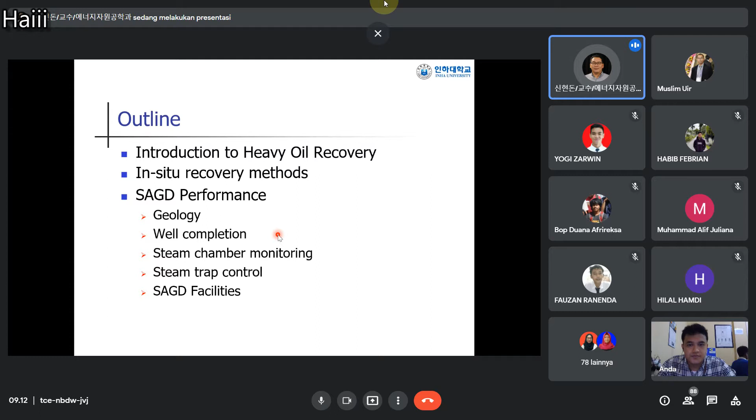So as I mentioned, some heavy oil and in-situ recovery methods depend on viscosity, in centipoise. But if the viscosity is high, the primary recovery factor is very low, and we need to do something to reduce the viscosity. That's why you use thermal methods, meaning you inject heat. One popular method is steam, a thermal process, a steam injection process.

We're not talking about oil shale here, because oil shale is an oily shale that exists as kerogen, so this is not oil yet. That means you have to cook it, heating above 340 degrees C to convert the kerogen to oil. The United States has a whole bunch of oil shale, but I think they don't have much chance to develop it because they have shale oil, and with the energy transition, the demand for oil and gas may decline or stay constant. So the situation has changed.

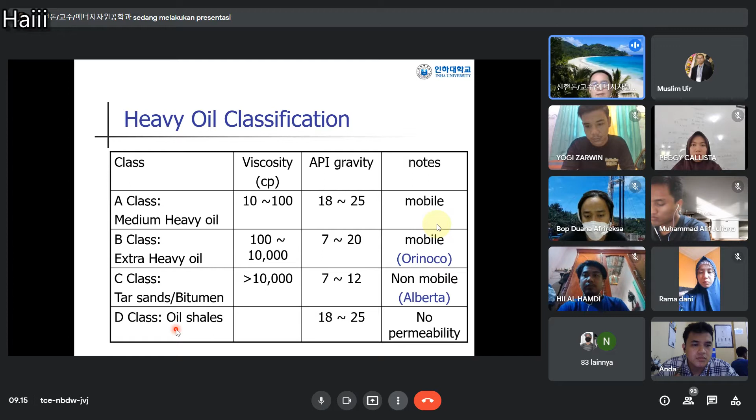Heavy oil and oil sand exist mainly in two countries: Venezuela's heavy oil is about 2 trillion barrels, and Canadian oil sand is also very close to 2 trillion. So the total world reserves at this time, probably by the end of last year, are close to 1.7 trillion barrels of total world reserves. But these numbers are actually resources—only 10 or 20% of the resources in these two countries have already been converted to reserves.

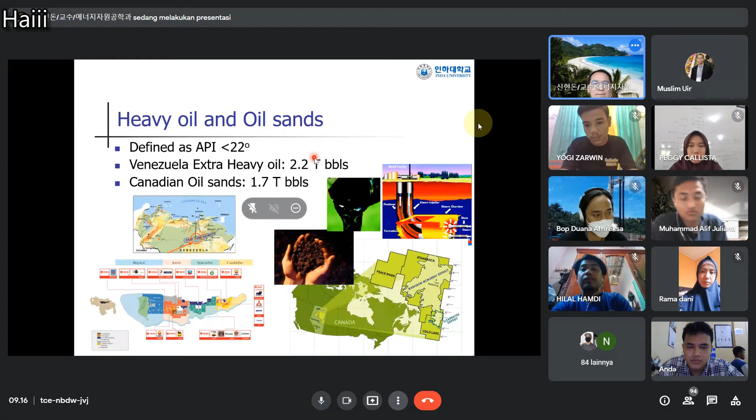We are talking about unconventional resources, which means they are difficult to produce. Why is it difficult? We have two issues. You already know from the Darcy equation that flow rate is a function of permeability and viscosity, and delta P between reservoir pressure and wellhead pressure.

We're talking about these two issues: permeability, how easily your rocks allow fluid to move from one place to another. For shale gas and tight gas cases, you already know gas doesn't have issues in viscosity. But why is it difficult to produce? Because shale and tight sandstone have very low permeability.

So if you want to increase production of oil, you have to reduce viscosity and increase permeability. If your reservoir has low permeability or high viscosity, you have problems with production, meaning low recovery. Shale gas and tight gas have problems in permeability, so how can you increase production by increasing permeability?

Hydrofracturing: you inject high pressure water and create fractures, breaking your rocks, then produce through the fractured areas. Now for oil sand cases, we have problems in viscosity.

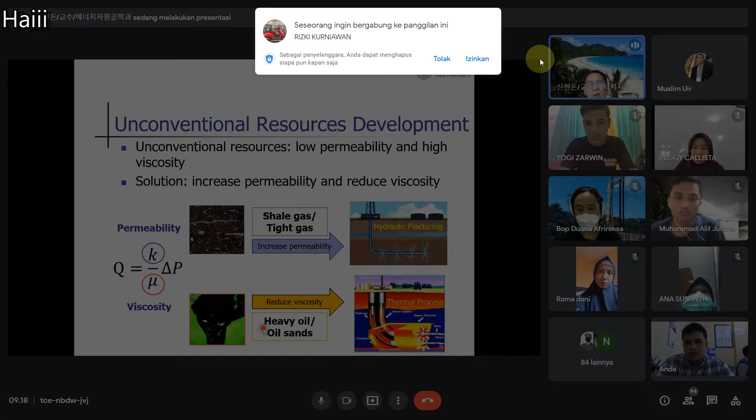In heavy oil and oil sand, how can you increase production? Maybe you have to reduce viscosity before main production. That's why thermal processes are applied to reduce the viscosity.

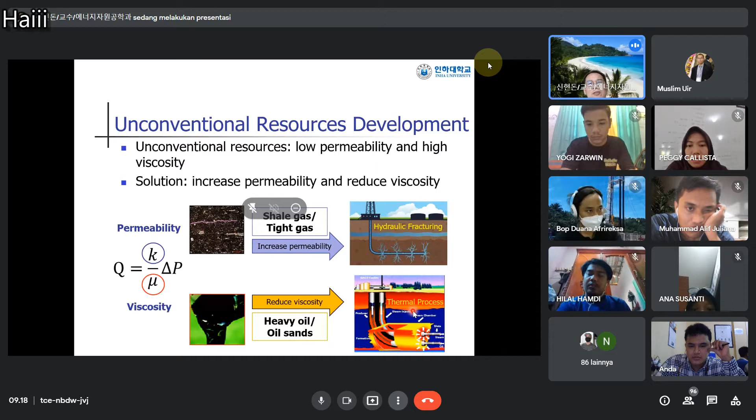These are the two issues. That's why unconventional resources all the time have one or two of these issues, either lower permeability or high viscosity, and you have to solve these issues to produce. Even for the same oil, sometimes they have different recovery processes.

Viscosity changes by log scale, and the x-axis is temperature. That means as oil heats up, your reservoir temperature increases by depth. So at a shallow reservoir, even at 10 degrees C, the viscosity of the oil can be 1 million centipoise, which is a huge number. Heating the reservoir up to around 55 degrees C...

...the viscosity of the oil reduces maybe to 1,000 or 2,000, which is enough for it to be mobile. That's why in Canadian Athabasca oil sand areas, the temperature is very low because it's shallow and Canada is very cold. The average reservoir temperature is close to 10 degrees C.

The Orinoco Belt in Venezuela has probably 500 to 800 meters depth. They have high geothermal gradient, so the reservoir temperature in Orinoco Belt is close to 50 to 60 degrees C. With the same oil, they probably reduce the viscosity down to 1,000 centipoise.

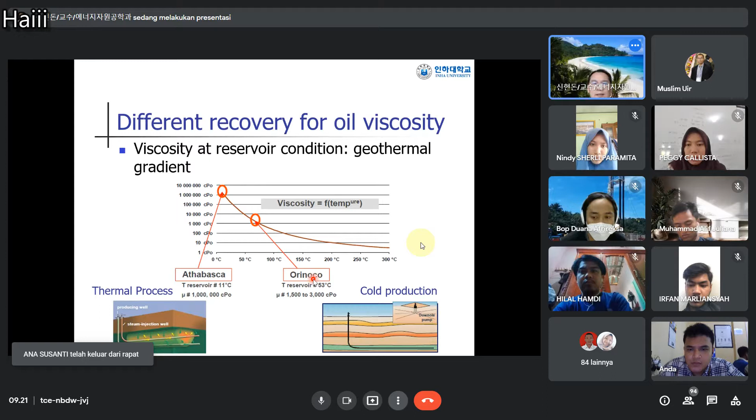Maybe maximum 15% depending on viscosity, even when viscosity differs within the same reservoir. But if you want higher recovery factors in Orinoco Belt, you have to apply a thermal process, and then recovery factor can go from 10 to 50%. In Athabasca, for the SAGD process, recovery factor is up to 50 to 60%.

That's why it's very important for the steam process to understand what kind of effect it has on viscosity. On the right hand side you have the viscosity graph we already saw: low temperature means high viscosity. AB, CL, and PR are different locations in the Canada oil sand basin.

AB is Athabasca oil sand, CL is Cold Lake, and PR is Peace River — short naming of regions. Athabasca has the highest viscosity, more than a million centipoise.

The lowest is the Cold Lake area, at 30,000 centipoise. It's a big change there. But once you inject steam and heat it up, this converts to around 10 centipoise range.

But be careful with steam. You make steam at room temperature or atmospheric pressure, which is standard condition. You heat up to 100 degrees C to make steam.

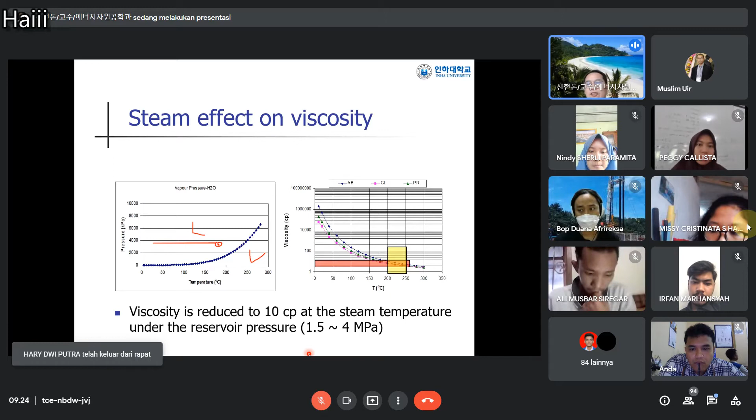Oil sand is sand plus bitumen, so it's unconsolidated - not consolidated rock. That's why it's mixed with bitumen with high viscosity. So two important things about bitumen: heavy and high viscous. That means the oil quality is not good, so it's cheap compared to conventional oil. Why does oil price change? Which is the expensive oil, which is the cheap oil? Because you use most of the oil to distillate into gasoline components. Heavy oil has more asphaltenes instead of light alkanes, or light condensate compositions like naphtha. So fewer light components - that's why it's cheap.

Why were they viscous or heavy from the beginning? No - when hydrocarbons generate underground, they were light oil. But I mentioned the deposition of oil sand and heavy oil is shallow. How did they move? They form in source rock, in organic-rich shale formations, generating lots of hydrocarbons. Hydrocarbon is lighter than water, and they move from deep locations to shallow locations by buoyancy. That's why they move up until they meet some trap structures. During that migration, the hydrocarbon experiences biodegradation - the grade actually gets worse, degraded by bacteria. The biological activities help degrade them, so we call it a biodegradation process.

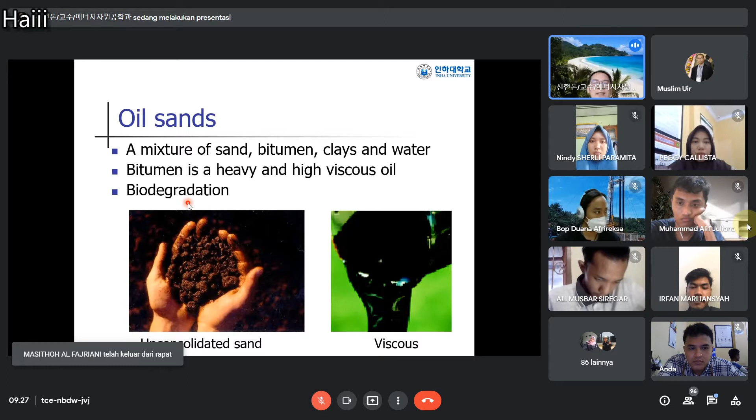Where do the bacteria stay? They live in the water formation. So the light oil moves to shallower places, and during migration it contacts the water formation. Then the light components from the light oil disappear, and the remaining oil gets heavier and more viscous. That's why they make tar sand and extra heavy oil in shallow locations.

Oil sand is good in the sense that it's easy to extract using hot water, because it's water wet. Water wet is a very important concept in petroleum engineering - it means your sand grain is covered by water, so the oil is between the pore space, and that means you can easily extract it from the sand grain. The same oil sand in the United States, in Utah, is oil wet - meaning the oil is sticky around the surface of the sand grain, so recovery is more difficult. That's why Canadian oil sand is easy to extract using water, especially hot water, in a mining process.

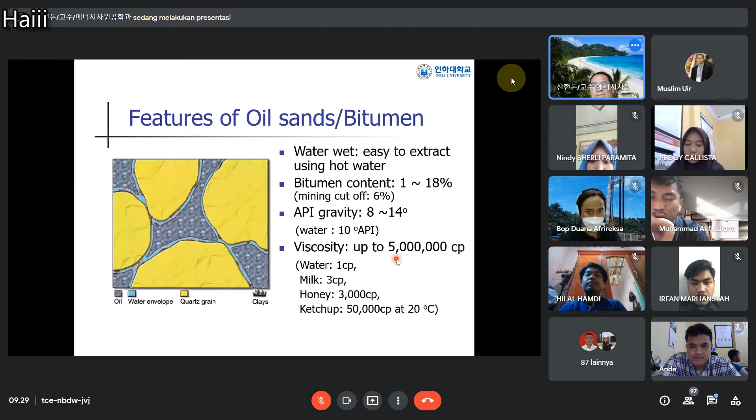API is sometimes less than 10 and viscosity is high. For example, honey has a viscosity close to 3,000 centipoise - you can imagine how viscous bitumen is. Sometimes it's 5 million centipoise, which is essentially solid with no mobility. That's why if you want to really produce oil sand, you have to reduce the viscosity - that's why you need to inject steam.

In Canada, these are the regions: the first province is British Columbia, and the second is Alberta. More than 70% of Canadian oil is located in Alberta province, bounded by the Rocky Mountains. There are two big cities - one is Calgary, where most oil company head offices are located, and the capital city is Edmonton. The University of Alberta is located in Edmonton, and the University of Calgary is located in Calgary.

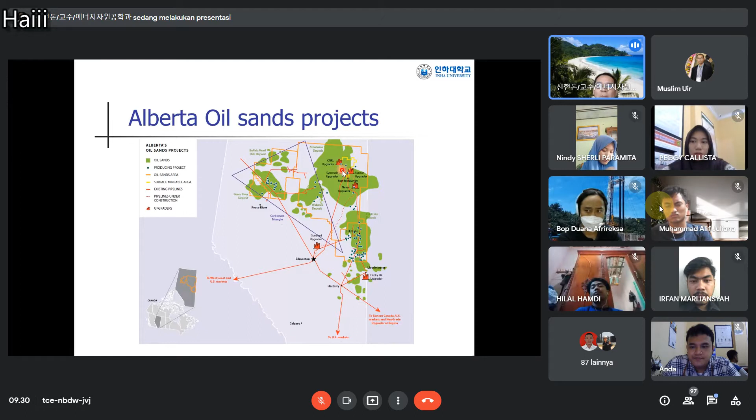Oil sand, how you can produce oil sand, there are two things. Mining process, because it's shallow at the surface mining, they do separation with big vessels, and they make bitumen. And then bitumen is a low quality hydrocarbon.

Hydrocarbon is composed of hydrogen and carbon. So these days hydrogen is very popular, right? You can separate it from the hydrocarbon. That's why these days 95% of hydrogen production comes from fossil fuels, because of hydrocarbon compositions, they separate. They add steam, because steam has H2O, which also has hydrogen, so they separate it from that.

So they upgrade it, meaning they make light oil, convert it to light oil, and make synthetic crude oil, we call it SCO, synthetic crude oil. And then they send it to the refinery.

The other method for oil sand production is SAGD, with steam injection, because there is no open pit - that's why we call it in situ.

In situ recovery, you inject steam, produce and separate, and then make bitumen. Usually you send this to upgrading, but upgrading facilities are usually integrated for mining. Why? Because the SAGD process for each project has a standard production rate close to 30,000 barrels, but upgrading facilities are more than 150,000 barrels. It's huge - that's why they can run 24 hours and feed these upgrading facilities around the plant at the mining site.

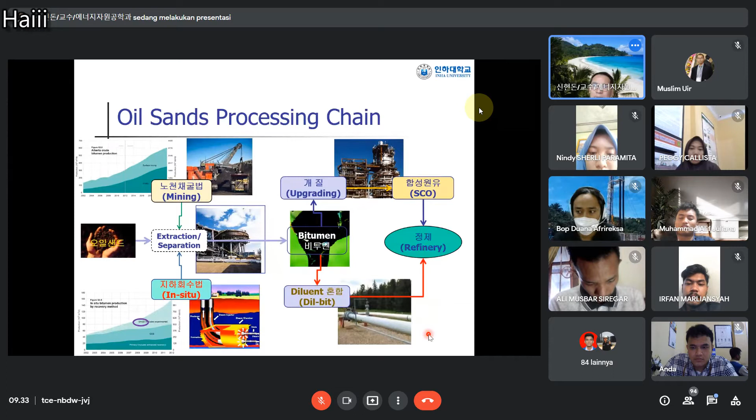Quick review for mining: they use shovels that are 100-ton size, and trucks that are 400 tons. So you load 4 shovels into this truck, and they generate 200 barrels.

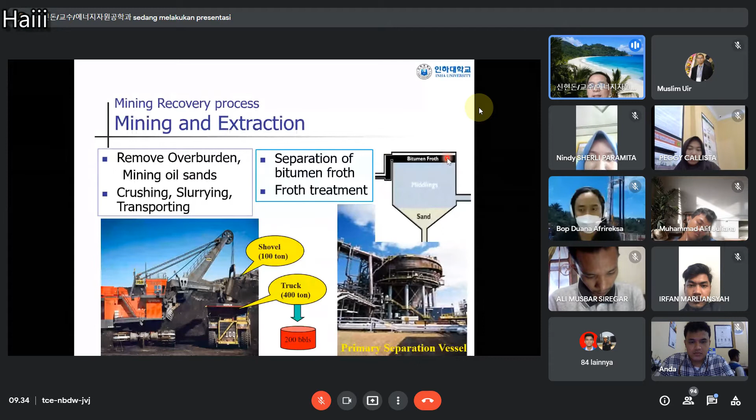They send this to big separation vessels with hot water, maybe 60 to 70 degrees C. They put in oil sand and stir it in centrifuges, and the heavy sand particles drop while the light bitumen floats via flotation. They remove this and send it to upgrading facilities.

Bitumen has a very reduced amount of hydrogen, meaning it's a heavier part of the hydrocarbon. Light oil has more hydrogen component compared to heavier oil, and heavy oil has more concentration of carbon because carbon is heavier than hydrogen.

So in upgrading facilities, how do you change the quality from bitumen to light oil? There are two methods: one is to remove or reduce the number of carbons, which gives you a relatively high concentration of hydrogen - that means light oil. That's how you remove the carbon - with coking.

The coking process produces carbon, and hydrogen addition means you use high temperature to crack the hydrocarbon bonds and add hydrogen to make light oil. The coking process is an old process - you inject 100 barrels of bitumen, and you only get 85 barrels because 15% converts to coke, which you remove.

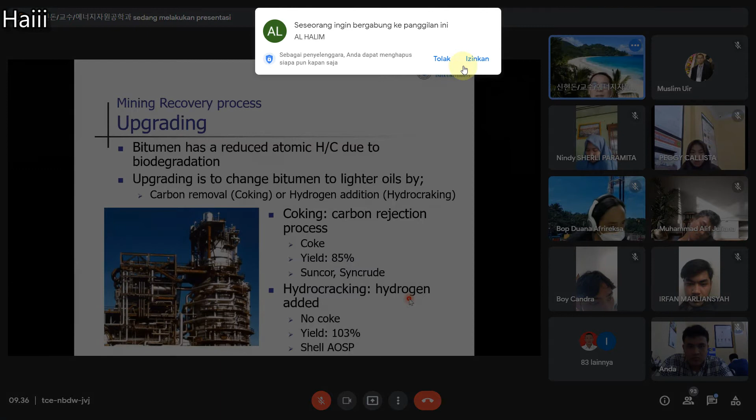Hydrocracking is a new technology compared to the coking process. The good thing is there's no coking, no headache, right? But they add hydrogen - 100 barrels of bitumen goes into the facility, and you can produce 103 barrels because you add hydrogen to make light oil. So that is the upgrading facility.

These days for hydrogen society, even if they don't use this for gasoline anymore in the future, maybe by 2050 or 2060, you can convert this to hydrogen production facilities through coking, or add more processes to generate more hydrogen.

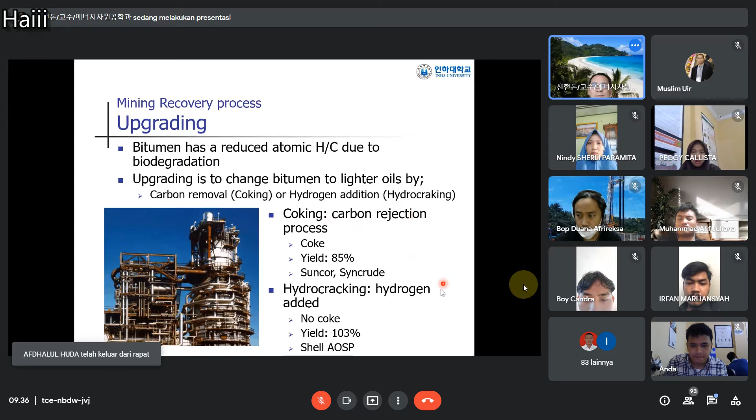One key parameter to evaluate the efficiency of the steam process is the steam oil ratio, SOR. This number should be low because the definition is: for 1 barrel of oil produced, how many barrels of steam do you have to inject. If the number is low, it means you have a better process requiring less steam, and less steam required means you don't need as much energy to boil the steam.

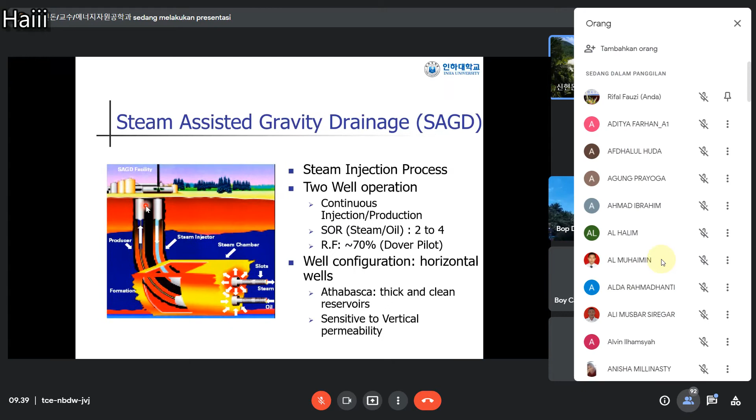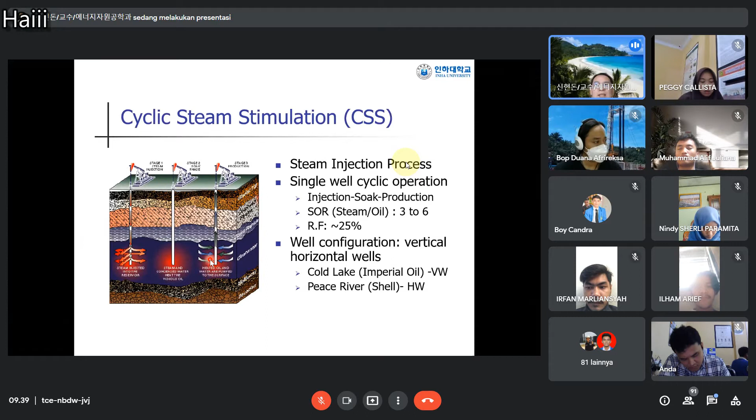These are two parallel wells drilled, and the upper well only injects steam. The steam rises and condenses to liquid, reducing viscous oil down to the production well. So this is the injection well and this one is the production well. The distance between them is 5 meters apart. These are actually a continuous process, because the previous one, CSS, is a cycle: inject, soak, produce. So the timing is different, right? Here it's continuous injection and continuous production.

So this one actually achieved up to 70% final recovery factor in a pilot project. And the steam oil ratio, less than CSS, is 2 to 4.

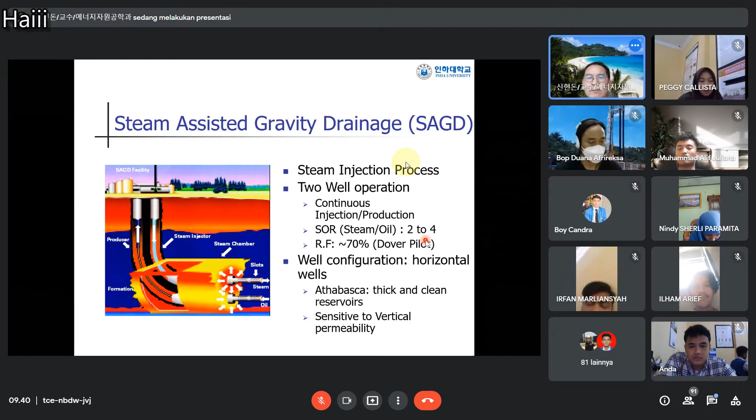So less than 4 means we can make money from this project. And for the steam process, lots of people criticize why you use steam, because you're using water and burning natural gas in the boiler. So people think about how we can reduce viscosity except by heat. They say, from the dilbit you may already know, right, you mix with light oil and you can reduce viscosity. So they apply this technology and inject solvent into the reservoir with SAGD-type, same horizontal wells, but instead of injecting steam, they inject solvent. But this process is actually very slow because it's diffusion at the molecular level, leading to low production.

So probably less than... just probably 5 cubic meters, meaning around 30 barrels per day from the pilot. So they did this pilot project, but they only had a chance to reduce viscosity at the interface. The problem is how you can expand or quickly replace the interface volume. That is very difficult, and also you cannot control it. And injected solvent actually goes somewhere near the reservoir, but we don't know exactly where it goes. So we call this solvent loss, the loss of solvent into the reservoir meaning no return to the surface of more than 50 or 60%. That's why they lose.

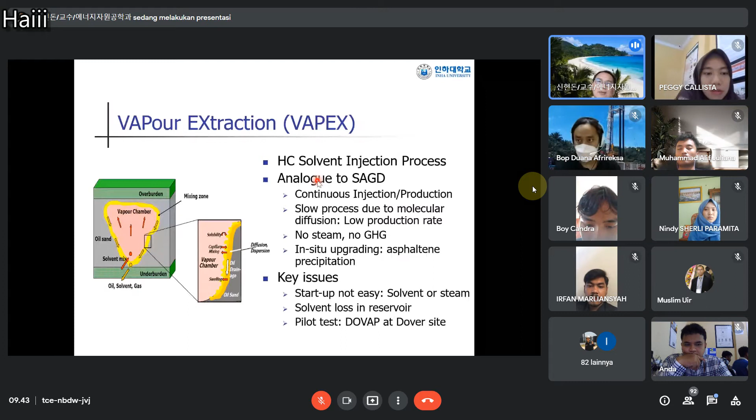Now people think, how about we mix the two? So hybrid steam and solvent co-injection. You get the synergy: some heating for viscosity reduction, and the solvent for dilution also reduces viscosity. They can keep oil production at a higher level, and at the same time lower the steam oil ratio. So it's a hybrid between these two.

But sometimes new people say instead of just using solvent for dilution, the solvent heating up can cause a phase change. So phase change means the vapor condenses to liquid and releases energy. But the energy absorbed during the heating is different for individual materials.

Maybe after class you can look at what is the latent heat. Latent heat of vaporization, look at the latent heat of water. Water is probably more than 2000 kilojoules of energy per 1 kilogram, but for solvent maybe only 300 or 400. So that means the solvent doesn't have much energy needed to vaporize. But why do we use water? Because you have to carry the energy from the surface downward. That's why the same volume of material carries more energy from surface to downhole. That's why it's very popular to use the steam process.

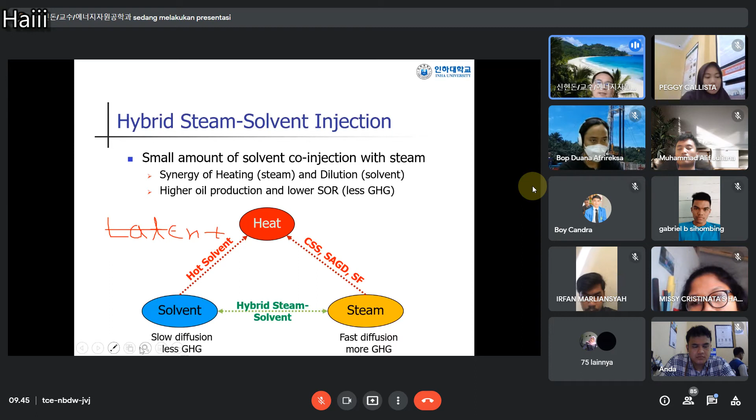Water compared to solvent has maybe 8 times higher latent heat. Alcohol in beer has around 800 kilojoules latent heat level, but that's still only 1/3 of water's. That's why water is easily accessible and has high latent heat. That's why when phase change happens, it can carry lots of energy to other places. In Korea in the cold winter, they circulate heating water, and hot water circulating releases energy to your room. It's the same thing.

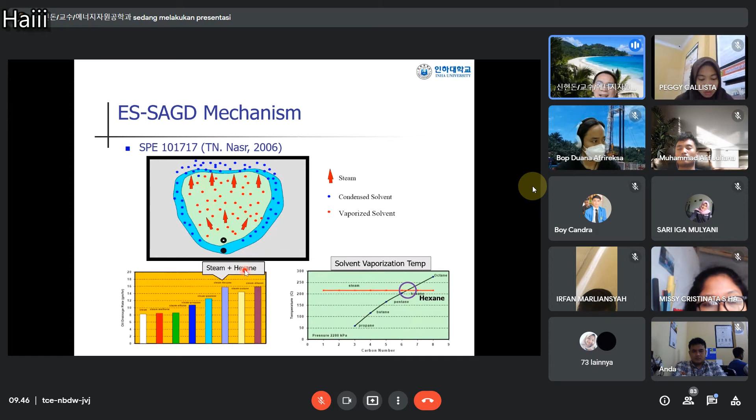One of the typical things is ES-SAGD, expanding solvent SAGD process. They co-inject steam and solvent, but different types of solvent give different recoveries. They found the maximum case is hexane. Why hexane co-injection with steam? It brings more production. Steam at this pressure, 212 degrees C, has the phase change happen, and hexane is very close to steam/water in converting phase at this temperature. So you have to select a solvent with very similar vapor pressure and temperature to main steam process. That's why steam with hexane gives the best performance - heavier one is better.

So I've finished the heavy oil introduction part, now moving to SAGD. As mentioned, we have 2 horizontal wells drilled, and steam rises up. At the interface with the cold reservoir, it condenses, and the condensate is heavier, so it flows down by gravity to your production wells, allowing continuous production.

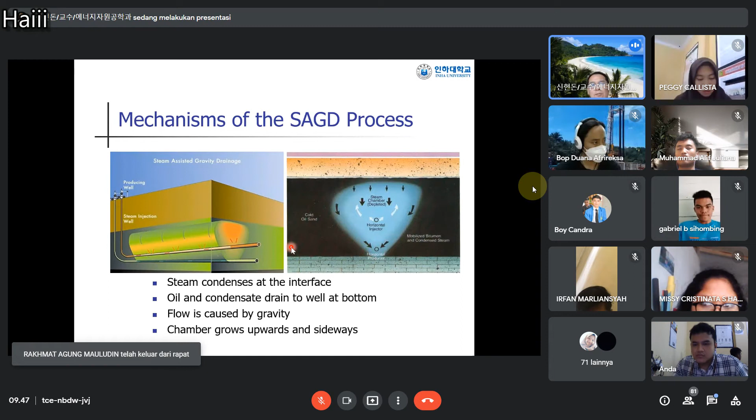From the beginning, you have rising and then expanding. Preheating means there are 2 wells 5 meters apart with no communication, no flow. That's why you have to heat up this area to create mobility first by circulating steam in these 2 wells. Later, you inject lots of steam but get no production, so you have to shut down.

That process we call wind down. Wind down means you maintain reservoir pressure by non-condensable gas injection. Non-condensable gas injection uses typical non-condensable gases like nitrogen and methane. Methane gas you can just compress - you cannot make it liquid. You'd have to cool it below minus 162 degrees C to make liquid, not ice. So non-condensable gas behavior doesn't depend on temperature change - they don't change condensation state.

Why do we care about condensation? If gas condenses to liquid, the volume reduces about 600 times. For example, 600 standard cubic feet of natural gas condenses to 1 standard cubic foot. That means inside your reservoir, empty space happens. Once condensed, that pore space becomes empty, and flux changes occur, leading to no production. That's what you have to prevent. Later, injecting steam doesn't make economic sense anymore - instead of steam, you have to inject non-condensable gas to maintain pressure. This is the typical SAGD process stages: preheating stage, steam growth, then mature and wind down strategy.

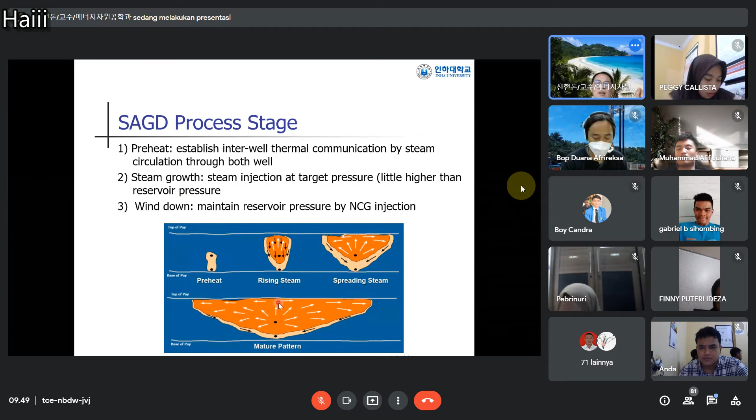This is usually measured by cumulative steam oil ratio - C means cumulative, meaning total average up to now. Around 2 is very good performance. Production rate per day averages 100 cubic meters, which is around 629 barrels. That's typical for SAGD.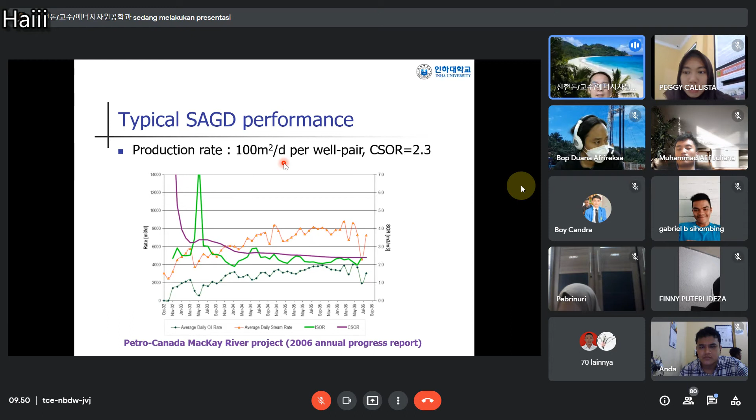SAGD performance is very sensitive to geology - where you drill, what type of completions, and how you start up. You can start with preheating by injection, direct steam injection, or circulation. The type of pump you use and your operation strategy also impact SAGD performance.

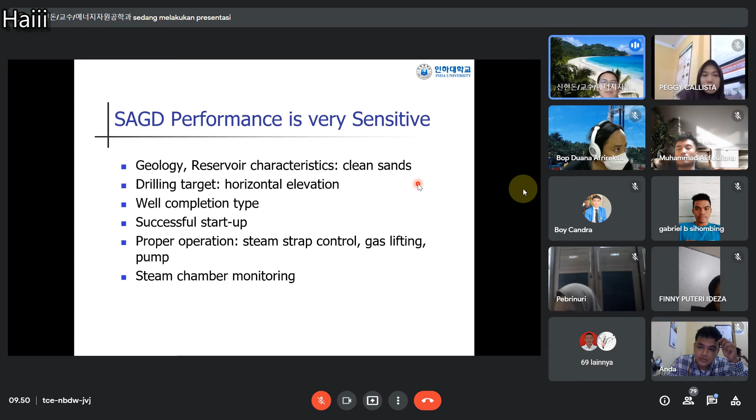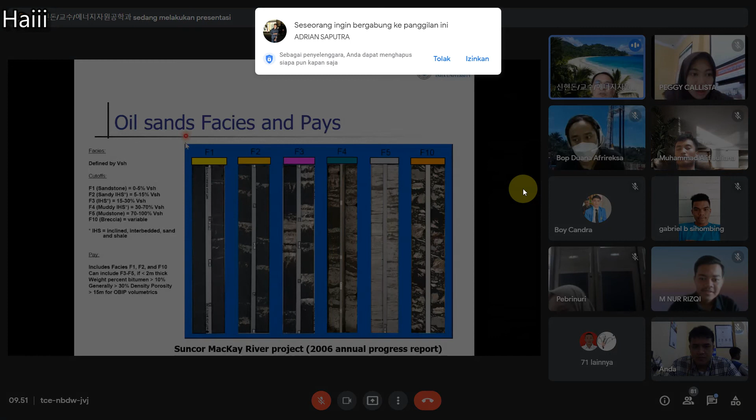But what is the size and continuity of this? We can consider from here that F1, F2, and this one also have lots of shale volume, but they're broken - meaning fluid can flow, steam can pass through. That's why in pay we can include facies 1, 2 and 10 from these pictures. For facies 5 and this one, steam cannot pass through in the vertical direction. But the problem is how extensive these shale barriers are - that is the key thing in the SAGD process.

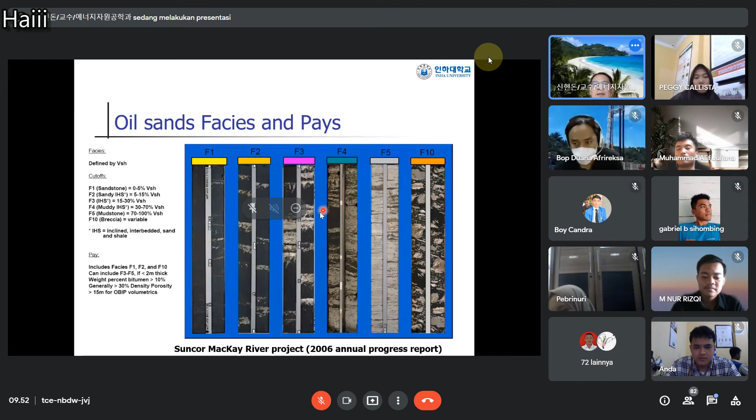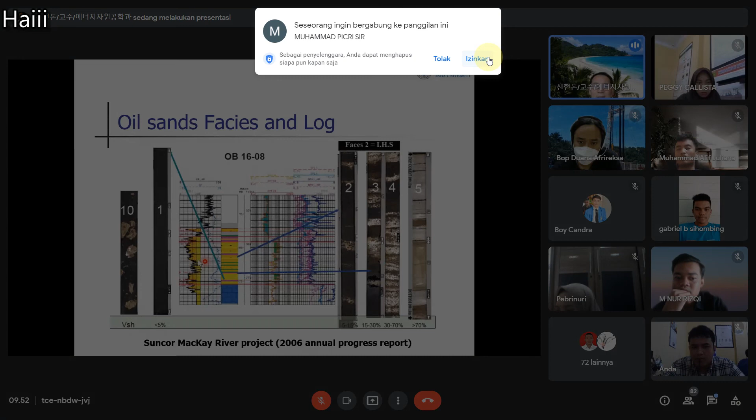And for logging, this one is a gamma ray, so we have to detect which one is a clean sand. Left side is clean, but this one maybe has some V shale volumes. Maybe steam passes or delays in this part. That's why interbedded sand and interbedded shale barriers are very important. They are critical, but how do they continue in the horizontal direction?

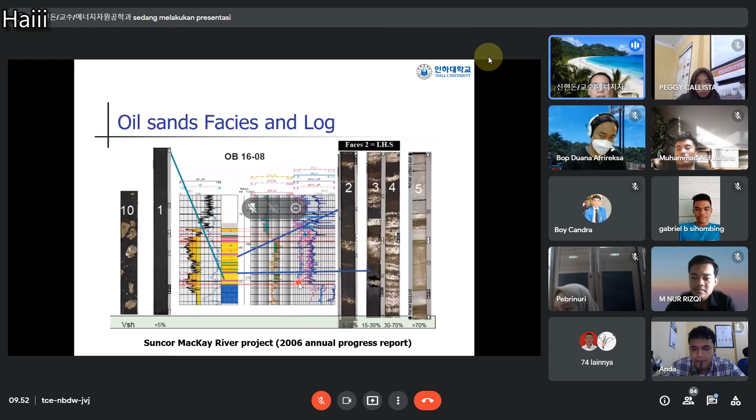This one is resistivity, right hand side is oil. So this is actually the sand body, which we define as a pattern. And this one is for thickness.

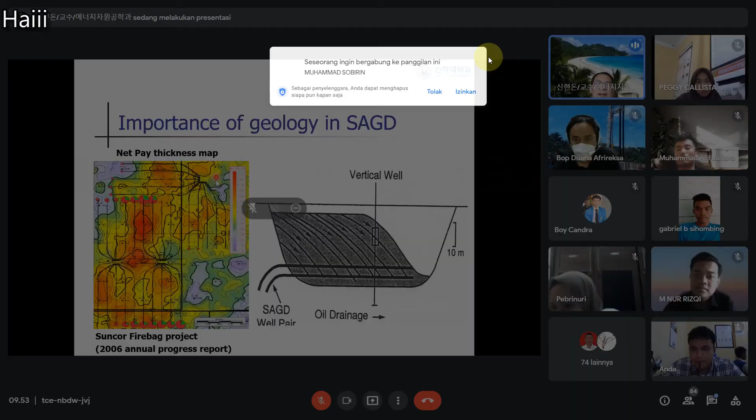These bubbles actually represent production rate. So big bubbles correlate with dark colors, and dark color means the reservoir thickness is high. That's why in the SAGD process, a thicker reservoir means better performance. At least for commercialization, 15 or 20 meters of reservoir thickness should be guaranteed to produce high oil production from the SAGD process. That's why geology is very important.

For example, maybe half of your horizontal section is located in a very thin reservoir. That's why the bubble size is very small. Even if the green part is oil, the other part is water. It's small, so that's why the first thing you have to check is what the net pay thickness is.

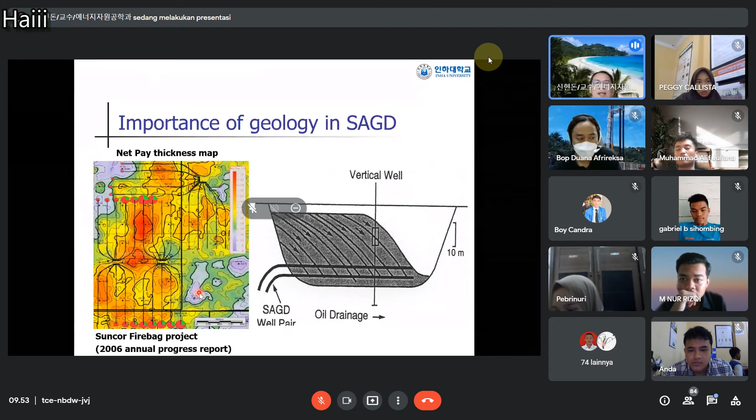And this one is for net pay maps, cross sections. This is a SAGD base, so you have to drill here. But below this you cannot produce because of gravity. So above the production wells you can recover by gravity, but below you can't. That's why you lose some of the reserve.

So some people think, okay, maybe we can drill in this part because we want to capture this section. But what about this part? They're located in the water formation, right? So no production - that means above this there's no production. You can only produce this one, so you have to make the balance.

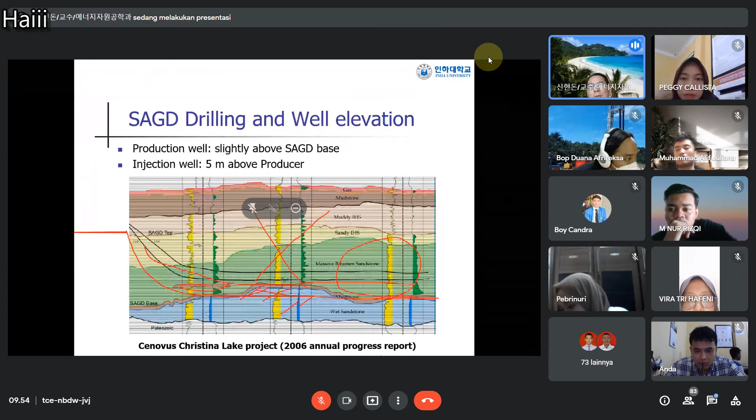That's why you have to avoid this kind of shale barriers or water formation. That's why these wells locate the horizontal sections above this. So how can you produce this and drill it? You first drill the bottom hole production well, then the second well is the injection well, following the same trajectory.

That's why you need some magnetic guide tools. During drilling they follow these trajectories and you can make them parallel, maintaining a constant 5 meter vertical separation with magnetic guide tools.

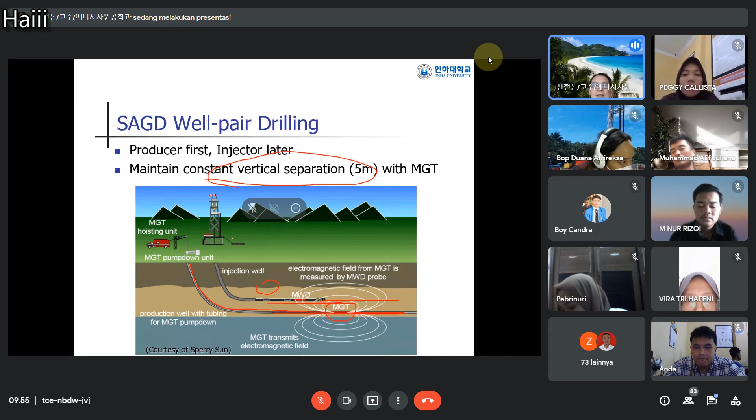And for circulation, how can you circulate? Maybe with one tubing to inject steam. But once you release steam here, the distance is around 800 meters. During travel to this location, they lose energy and no longer have vapor - maybe the steam already changed, condensed to hot water. That means the heat release amount gets smaller.

So they changed it - okay, maybe separate into two tubings. Inside the big tubing they have a smaller tubing, an inner tubing, and they release steam at two positions: one at the heel, one at the toe. These days, every 100 meters they have control valves to release the steam more homogeneously or equivalently.

And production wells are very simple, right? You just use one tubing for production. And we have lots of thermocouples to check the temperature across around 800 meters, to see how you can control it - which part is cold, which is hot. Because cold means no production, so you have to manage those cold production areas.

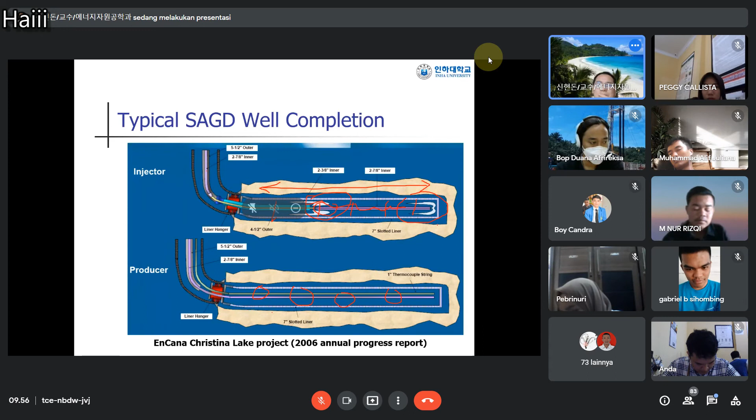And this one is for sand control, because oil sand is unconsolidated sand. That means you have a high risk of producing sand. That's why on your tubing or liners you actually make holes, slots - we call this a slot. This slot size is actually smaller than the sand grain.

So that's why you need sand grain particle distribution analysis to design this slot. This one is a liner you can make, or sometimes you use wire wrap screen or tubing. But this tubing has holes inside, right?

And fluid actually goes between the wire, like this. In here, between the wire, they have some space, and they get into this one. So good things for wire wrap screen, very strong, and they have lots of exposed areas. That means they can produce or accept more fluid than a slotted liner. That is the type of sand control unit.

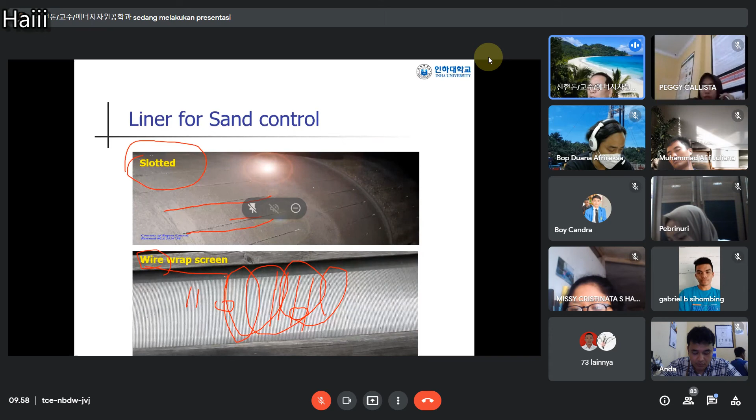And this one is a pump. In some cases you don't have any pump here, it's just a wellhead, but they have to inject some gas. Gas is actually light, and they mix and lift with the liquid. And you have the very popular rod pump here. The other one is an ESP pump, electric submersible pump, downhole. So you have the electric wire connecting the motor downhole, and they suction and produce.

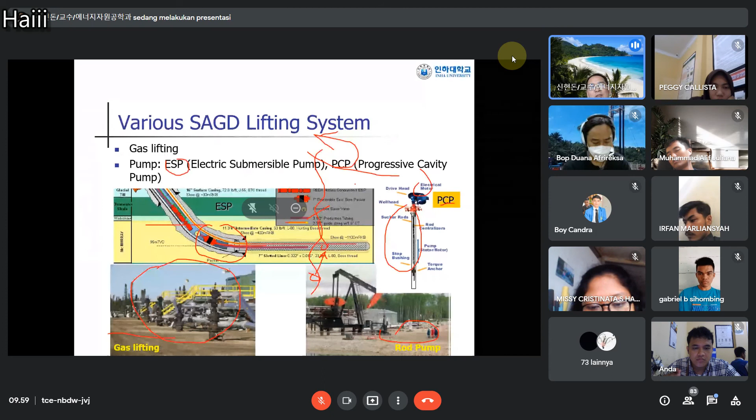The other one is very popular for unconsolidated heavy oil cases, it's a PCP pump, progressive cavity pump. That means you have the rod actually like this. At the surface, you rotate this guy, rotate and pump with an electric motor. And this empty cavity actually moves in this direction, and they deliver the fluid and even sand to the surface. So the most popular one is the ESP pump. In some cases, you have the PCP pump if you expect lots of sand production.

And for monitoring, you need 4D seismic because you can distinguish some areas that produce or areas with no production, because you inject steam. The produced areas are already occupied by steam. Steam is a vapor with hot temperature, and seismic amplitude changes. And you have, okay, this one, you have the steam chamber here. But the cold area looks cold, doesn't have any steam. So that kind of thing you can monitor, how big our steam chamber is, and along the horizontal wells, which sections or which part doesn't produce.

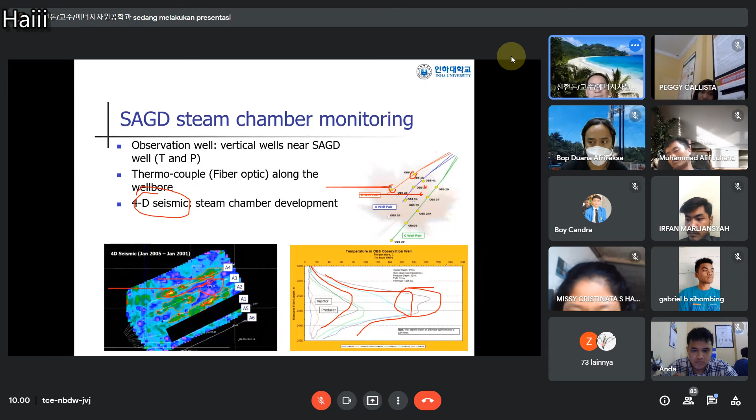And almost finished, so for SAGD operation facilities, you need water. And then you make steam generation with boilers. Depending on the type of boiler, you make 70% steam and 30% liquid, and you have to separate the steam because you have to inject 100% steam. And from the production side, you produce oil, gas, and water, and they separate. Water returns to the cycle for water softening treatment, and they recycle it.

And gas, maybe from the beginning they could flare it, but these days they can't, by the rule, government regulations. And the bitumen, maybe you can truck it if production is small, but usually you have to have a pipeline for sales. And water, some water you can actually dispose of, with the high content of solutions they have. So this one is a cycle.

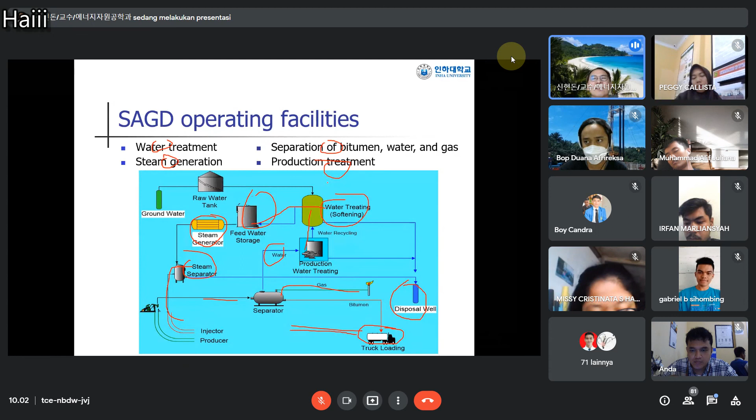So the most key facilities are water treatment facilities, steam generation boilers, and separation and production treatment. Because in some production, even once you separate, some oil still has some water or gas, and also water has some oil or gas. So you have to do more secondary or next stage separations to treat the production fluid.

And this one is for field locations they have. And if you see, okay, this one is for boilers, and they send the steam to the field in this direction, and production comes in this direction. And this one is facilities, so they have de-oiling or de-watering and water recycle, water treatment.

And sometimes, because for diluent you need diluent, and also diluent is sometimes used for easy separation of your bitumen from water. So that's why sometimes you have the diluent process. That kind of thing you can easily find at the field.

So oil sands have lots more treatment before production. You have the boilers and steam injection, that means it's big facilities. One means this facility is a big business, maybe some EPC construction company involved in this business, because it's a big money operation, since they construct some facilities.

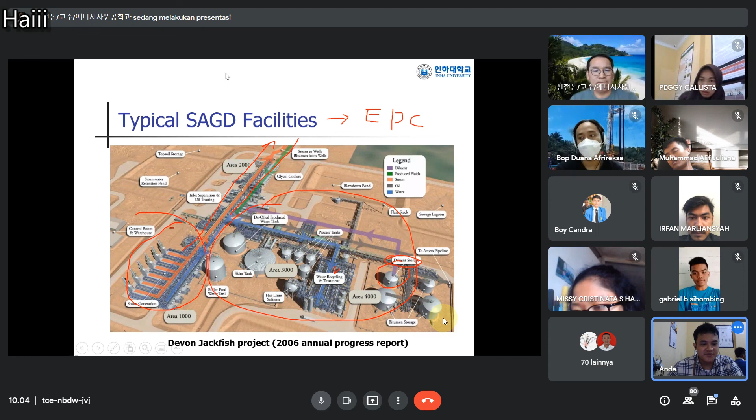Hello, hello, hello. Morning.